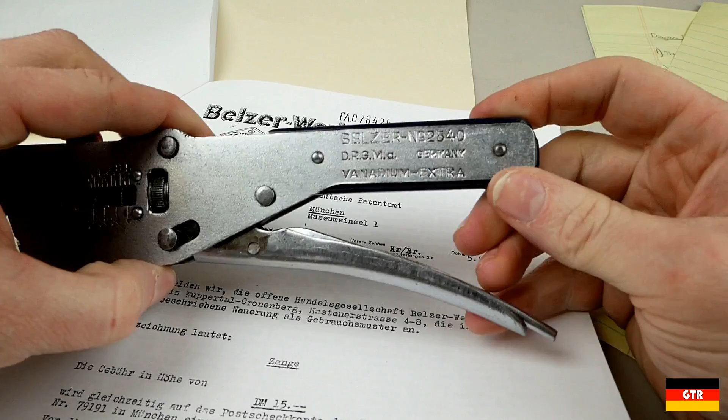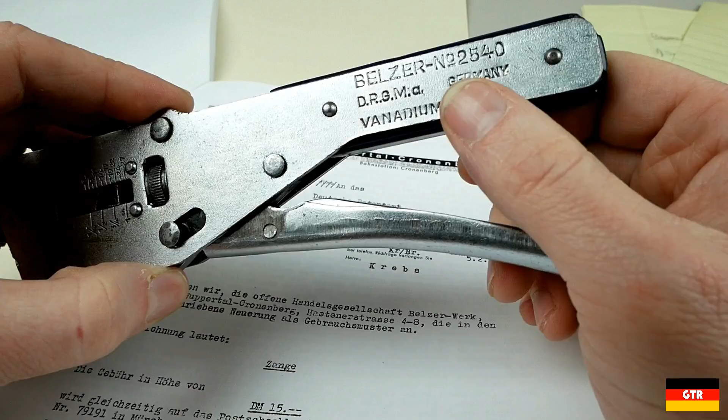Now, we know DRGM was only used up until around 1945-46, but from what people have told me, that extra character is a kind of an extension. So it's possible that

this was made in the 50s. It's kind of an unusual patent, because the way they're talking about it, they sound like they invented the vice grips, which we know have been around since the 20s. And it's not written like a patent like you see today. It's more written like a sales pitch - kind of like they're describing a pair of normal vice grips.

There's really nothing in here until you get to the diagram explanation, where they actually talk about specific pieces of the pliers. If you look at that diagram, it's pretty much like the pair I have.

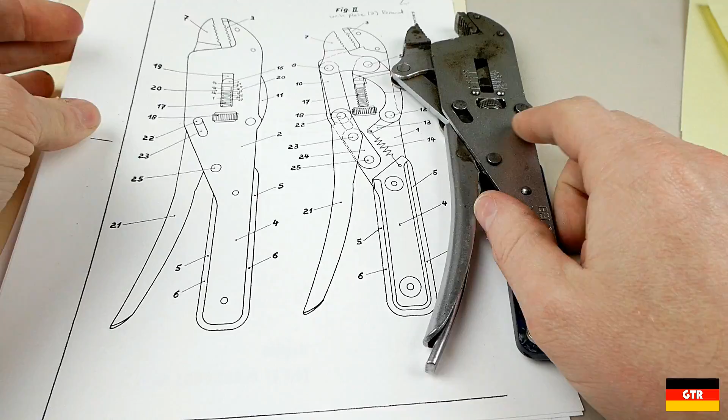It's almost exact. There's one minor difference - these two rivets right here do not appear in the diagram. But other than that, it's exactly the same, even up to the markings for inch and millimeters on this scale.

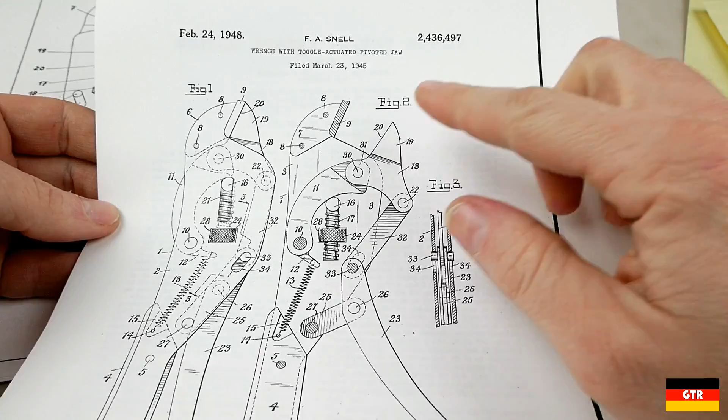So here's a very similar patent that I found, filed in 1945. It's almost an identical diagram, really just mirrored. It seems like this Belzer one might just be a rebranded version of this, with their name stamped on it, but this one doesn't have any scale on it, and that's really the only difference.

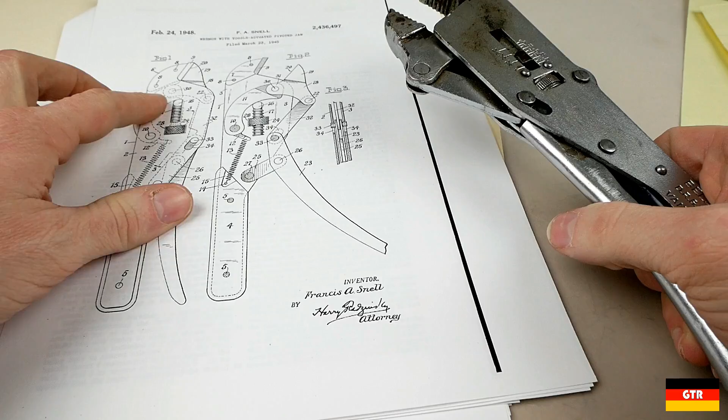between the two. So it got me wondering why we didn't see this particular design after the 40s and 50s, when there were a lot of ones from a company called BMC that looked very similar to this, and that's actually where that 1948 patent came from.

If you look at pretty much the universal vice grip design now, this one has a complexity level much greater than this one in terms of manufacturing, and I'd say also maintenance. If you just count the number of rivets here, you got 1, 2, 3, 4, and then a spring, a bolt, a release lever, and a bunch of pieces of metal with a little weld there as well.

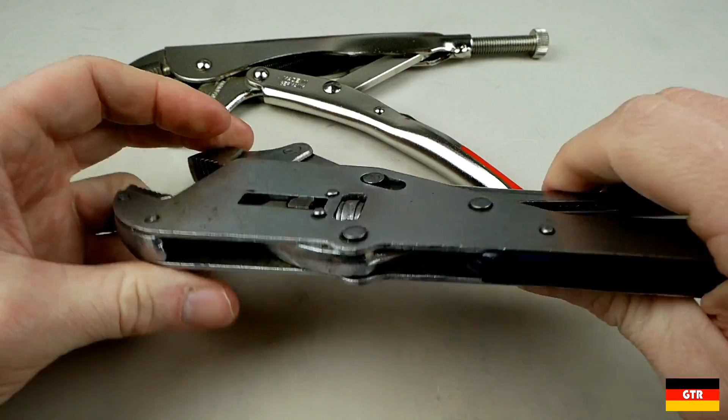If you count the number of rivets in this one, you got 1, 2, 3, 4, 5, 6, 7, 8, 9, 10, 11, 12. So it looks like we got about 12 rivets in this guy. So the amount of manufacturing time is about 3 times as great.

And I know these rivets don't take a lot of time to put on, but when they were manufacturing these, I'm sure they had a press, and a guy would put the wrench under there, would hit those - and you can see they got different sizes on here, so this would be multiple stages. Probably one guy would do one size, and then the next guy would do the other size rivets.

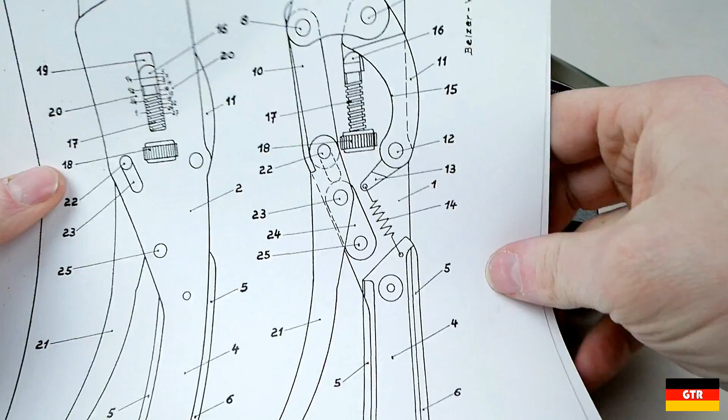But I definitely see one advantage to this design that's not in the modern design. If you notice how parallel the jaws are on this guy, that's more of a result of this curvature right here, because this curve is what the adjustment bolt is riding on - that's how you change the opening. So the pivot point is way down here, whereas the pivot point on this one is much closer to the jaws, and that's another reason why you get the parallel action.

Now, I know they make parallel jaw versions of these - the true parallel ones are kind of funky, they have like a pole coming out. But that's one thing I see you could get out of these that you can't get out of most modern vice grips.

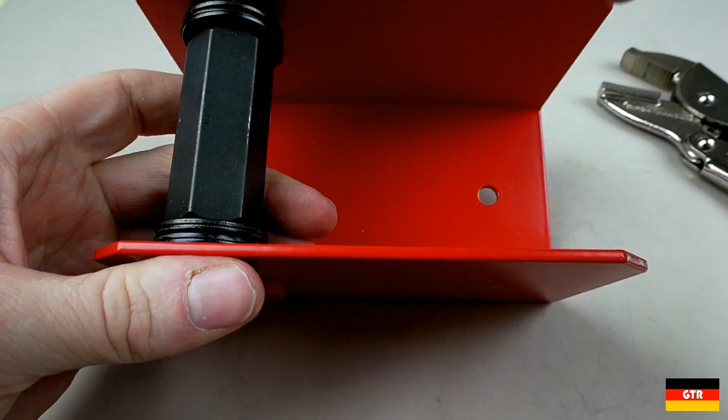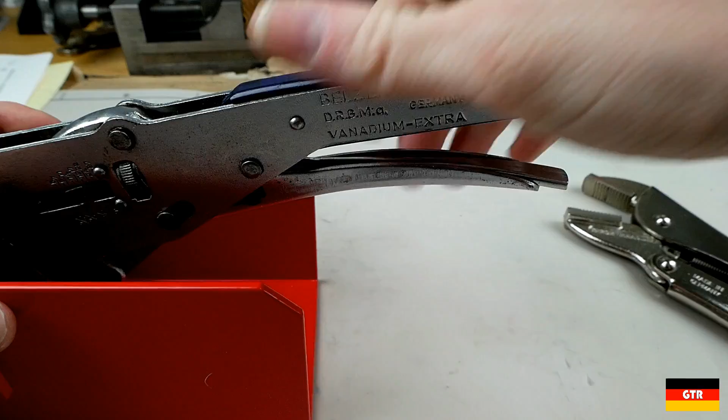So just to give you a small example, we got a Knipex test fixture here for testing their adjustable pliers. So there we go, we're locked on, and we can turn this as we need. This particular one does have an adjustment release lever, which I suspect was added after, but it's very hair trigger.

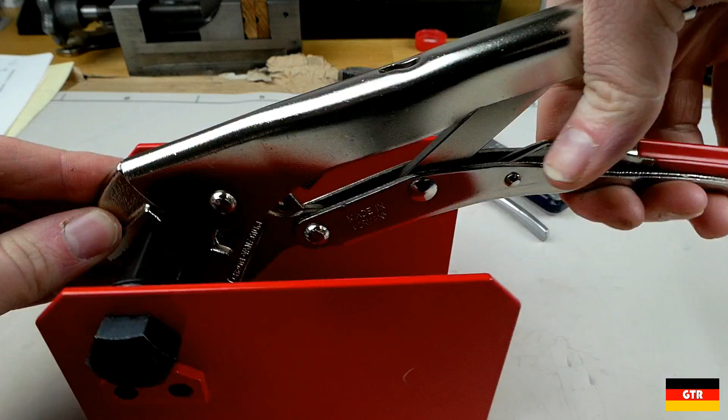If we take the other design Vise Grips, you can kind of see in there that we basically only have a grip on the edge of this hex shaft. So you can see it slipped there a little bit to the next tooth, so I wouldn't feel too confident about keeping that on there and turning something with it.

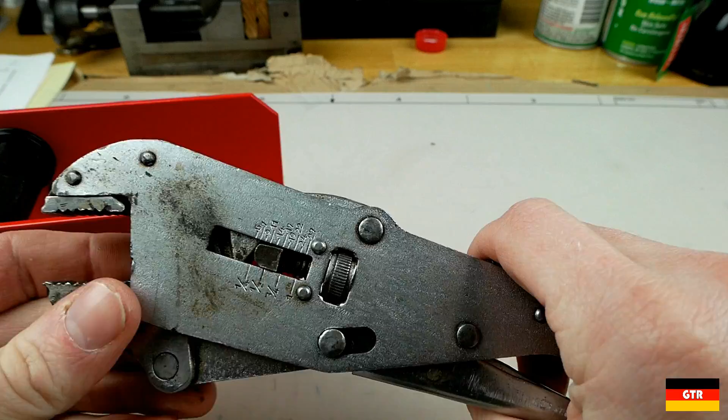So that's certainly an advantage of this type of Vise Grip, if you need to grip onto a big piece of stock, a really thick piece of stock - these appear to be much better suited than these.

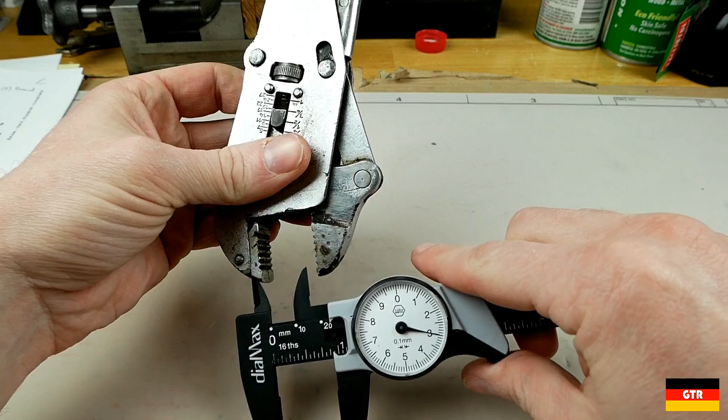So let's check the scale on this to see how close it actually is. I've set it to 19 millimeters. So it looks like moving the bottom of the adjustment to 19, we're at about 23. So let's see where it ends up actually on 19.

So it looks like it ends up being about 14. That could be because this has been worn down, but I don't think most people would ever use that scale anyway. The plan for this guy is I don't think I'm going to do any kind of full disassembly.

Removing the rivets is possible, but you'll probably never find a matching rivet. And it still works, so there's really no reason to take it apart to do any type of repair.

So what I think I'm going to do, it's really just kind of crusty. It doesn't move very well at all. I think I'm going to try to soak this in a volatile solution, probably in the sonic cleaner, to try to get all the gunk out.

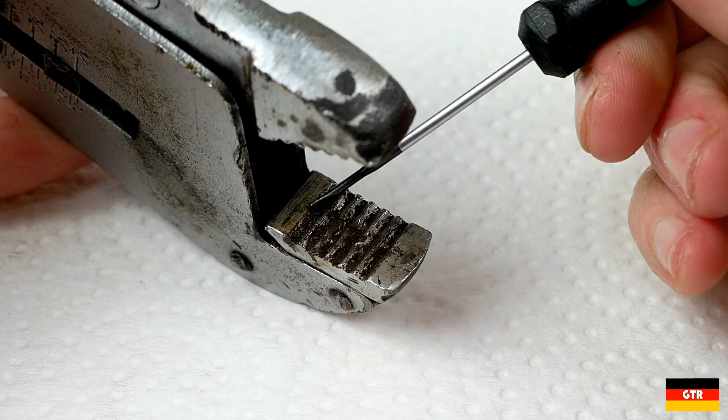And then what I think I'll try to do is sharpen these jaws a little bit. They're a little bit worn down. We'll see if we can put a file to those. So these were definitely well used by somebody. Let's get as much of that gunk out of there before we soak it.

So there was one rivet in here that's really quite loose. I'm debating about whether I should try to repeen that, but I probably would end up ruining that rivet.

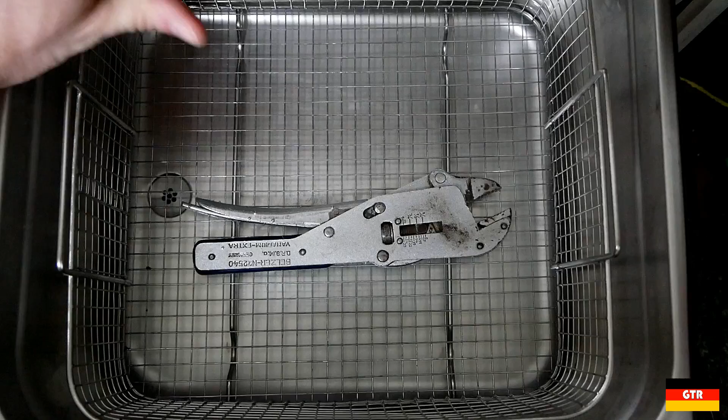Alright, so I got this down in the sonic cleaner. I know people have been asking me to do some more detailed stuff on this. So this one really is not a good sonic cleaner. It's really just one of those one hung low made in China brands. I don't even think it has a brand name on it, because the really good ones are extremely expensive.

I think I picked this up for like $200, and this is a 15 liter. A 15 liter in a decent brand would probably be around $1,500 for that size. So one of these days I want to get an Elma, which is a well-known German brand of sonic cleaners. But at this point I don't really justify spending that kind of money.

So what I typically use in here is just any kind of cleaner. You can usually just use like dishwasher liquid soap, or dish soap. Works fine. For heavy duty stuff I'll use like a degreaser. You just go to the local home store and pick up the cheapest degreaser you can find.

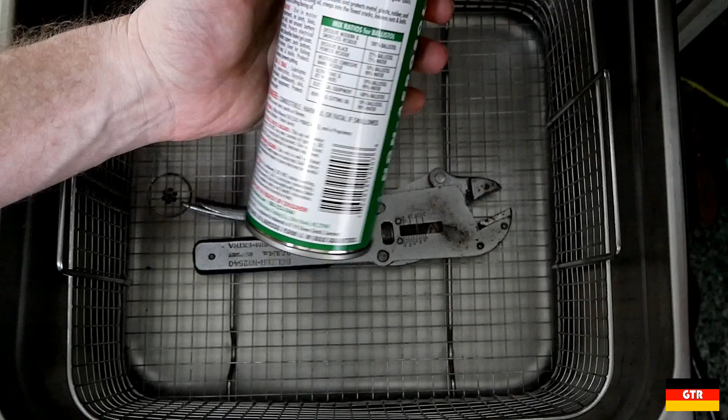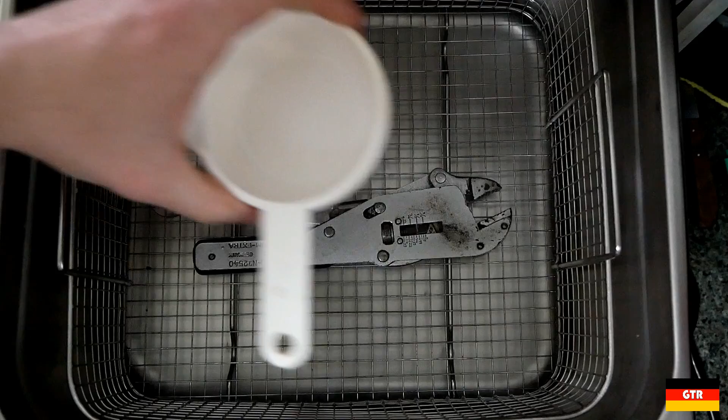And that typically works. But for this one I think I'm going to actually try to use some of this Ballistol, because it does say on here ultrasonic, 10% Ballistol, 90% water. So I just measured, I got 2.5 liters in there. So that would mean I need 250 milliliters of Ballistol. And 250 milliliters is just about 1 cup. So we'll put 1 cup of Ballistol in here and see what kind of job it does.

Holy moly. It's kind of a strange reaction there. I guess maybe that happens when you mix it with water. Just some safety things - I've heard stories about people breaking their fingers putting their fingers in here when it's running. I don't think this one's strong enough to do that, but normally you can see the dirt kind of pushing away because this stuff's so cloudy now. I don't know if you're going to be able to see that.

All right, so we'll turn it on. We'll give it like a 5-minute cycle. And then, so what you're going to hear is it's really loud, so don't expect to hear anything after I turn this on.

All right, so you can see after 5 minutes how much more dirty that water is. So yeah, I think I'll put it in for 5 more minutes. Alright, so you can see how dirty that water got just from those 2 cycles. And it looks like it did a pretty good job of cleaning that up.

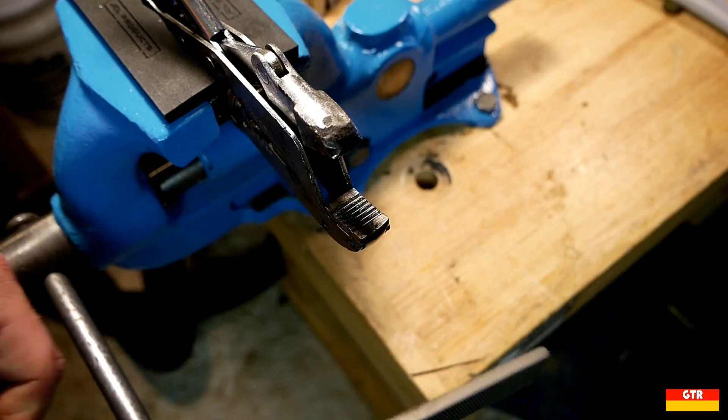So I think we'll just rinse this off with some water. See if we can clean up the jaws a little bit, see if we can sharpen those. Alright, so I think I'm going to try to clean up these jaws a little bit. They're a little bit mangled. Try these new Pferd files I got.

Yeah, the handles on these Pferd files are nice. And then I'm going to use some of these key files to kind of clean up the edges on there.

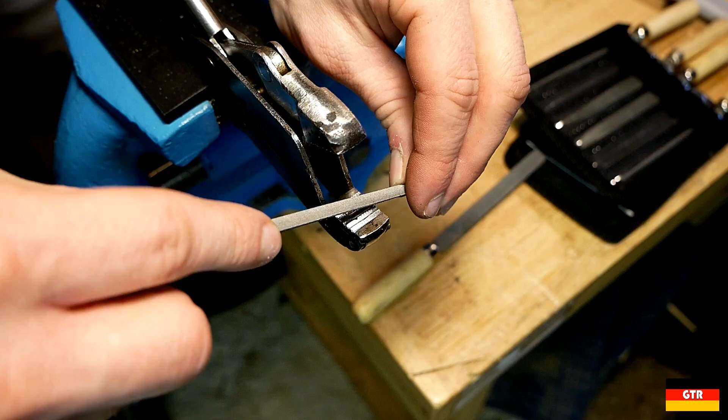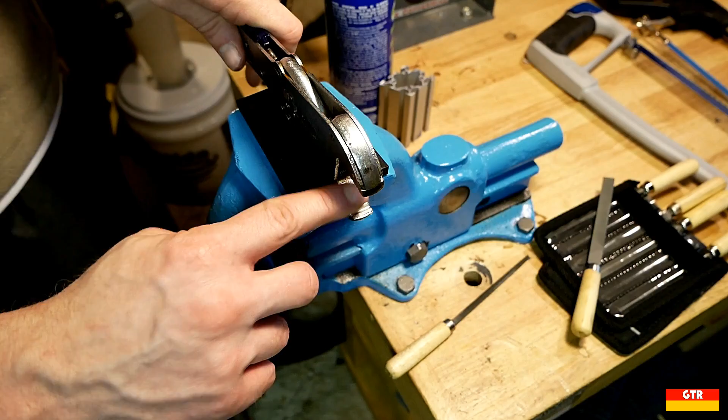Alright, yeah, I'm pretty happy with that. We'll flip it over and hit the other side. Alright, I'm pretty happy with that. Definitely is a lot sharper than it was.

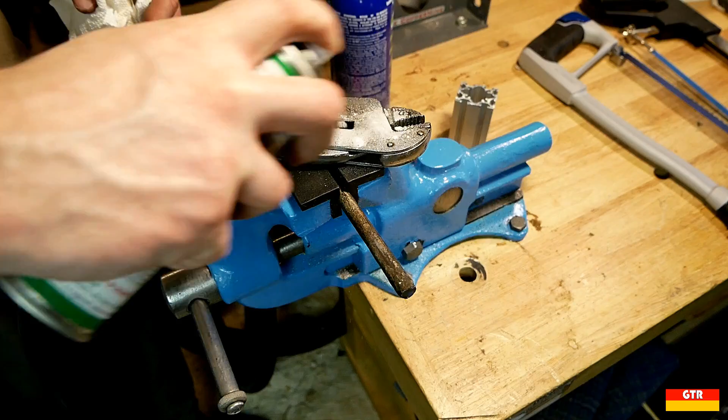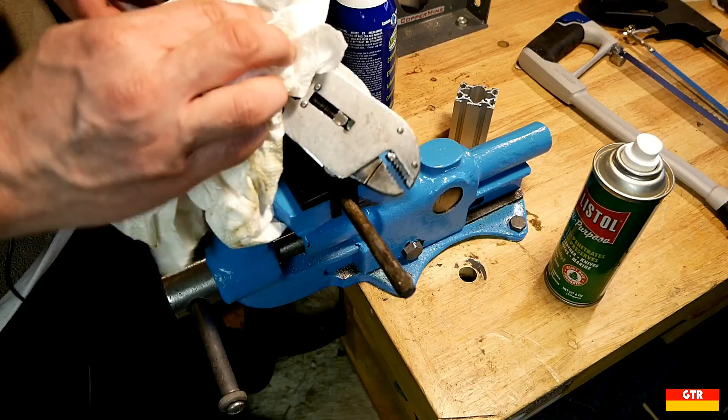Now I think we'll lubricate this with some Ballistol. What this brown stuff is that you see leaking out, that's actually rust. And I decided not to de-rust this because the outside looked pretty good, but apparently there must be some rust down in the rivets, the joints. But it's not that bad, I think I'll be alright.

The only other thing I might do here, this pin right here is pretty loose, and sometimes it kind of binds on here, so it might be something I need to replace in the future. It looks like it got so much slop in it now that it's not fitting in there very well.

So just a quick test, let's see how it grips onto this piece of mild steel.